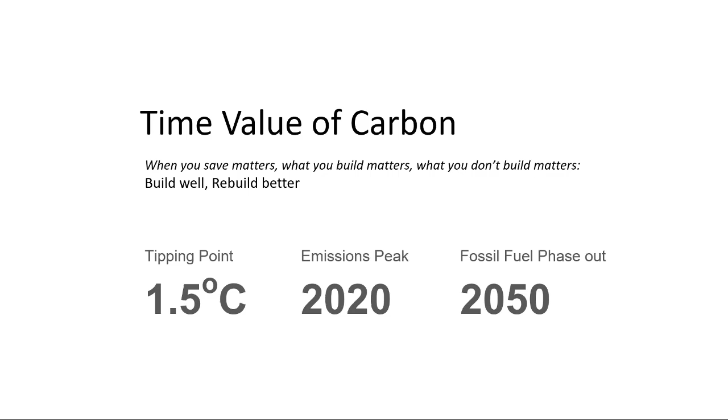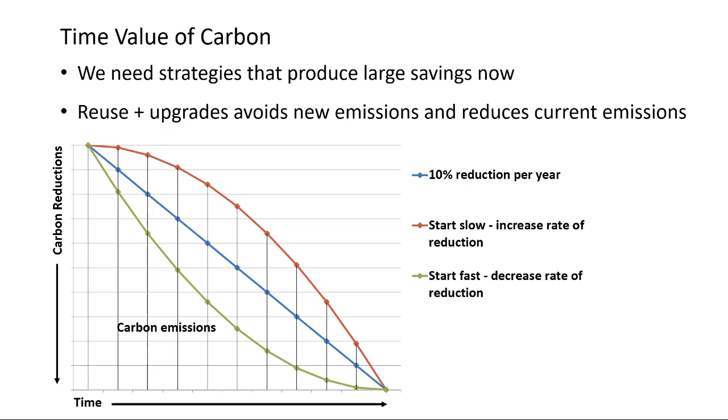But the embodied emissions are actually a huge piece. And the reason they're so important is they're the emissions that happen first in a building's lifespan. If you look at a building's lifespan, those emissions happen right off the bat, and then operating emissions happen over time. So in my book, they're the most important emissions to try and reduce.

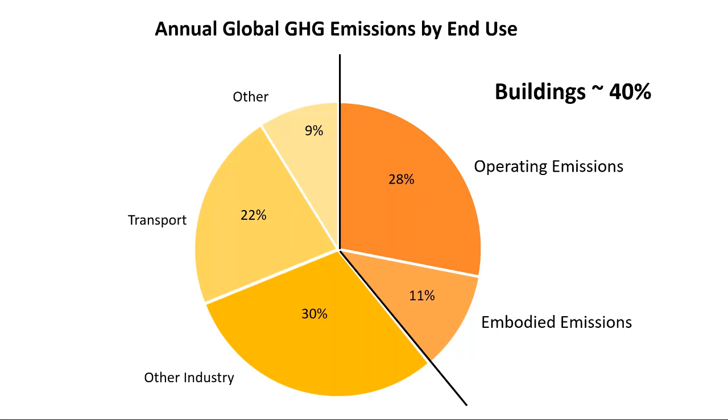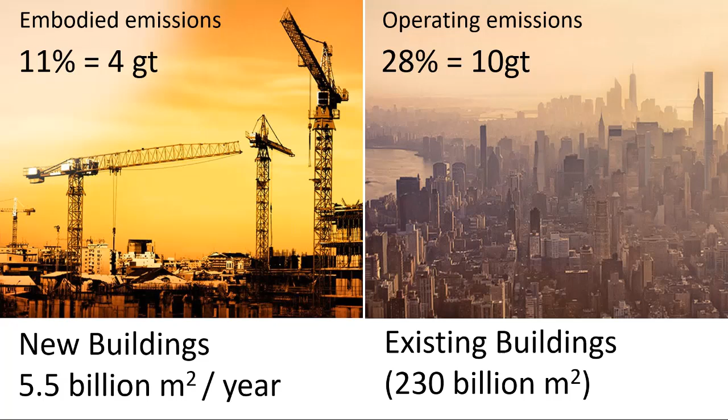The other thing to keep in mind is that the embodied emissions come from what we build every year, which is about 5.5 billion square meters globally. And it's about 11% of our emissions, about 4 gigatons. Operating emissions happen from all the buildings we already have, by definition, and that's 230 billion square meters. So the amount of emissions per square foot is much higher for building a building than for operating a building. We probably already knew that, but that's important to remember.

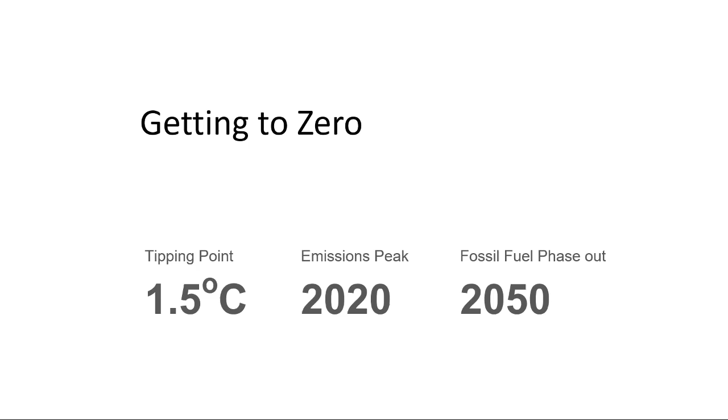So how do we get to zero in the next 10 to 30 years? Really, the next 10 years is what I'm focused on mostly. Architects think about getting to zero this way. We love making new buildings. We want to make new net zero buildings. There's lots of programs to encourage that. So we focus on making new net zero buildings.

We're beginning to think about reducing embodied carbon. There's a lot happening in the AIA starting to focus on this, and it's really important, a huge piece of it. And upgrading existing buildings is not on architects' radar. It's on cities' radars, but not on architects' radars very much. They'd rather build a new net zero building and talk about how great it was. So I think we've got it backwards.

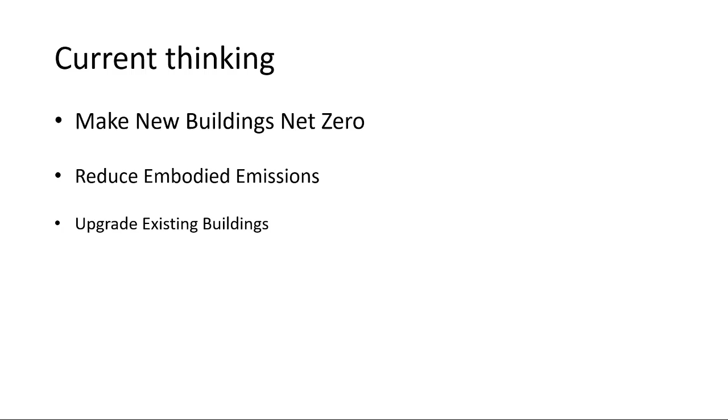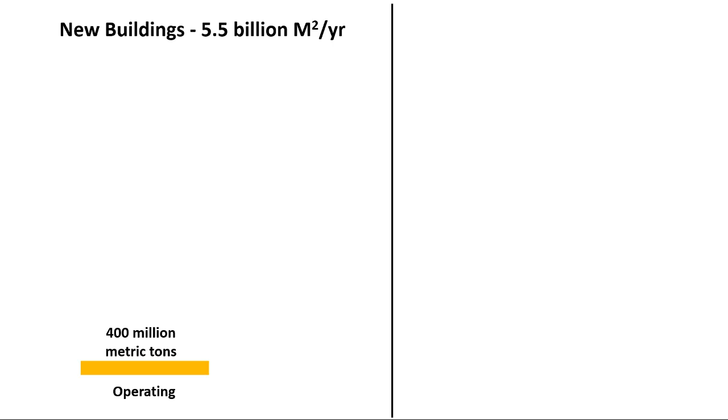And here's why. The new buildings we're building every year emit about 400 million metric tons of carbon to operate, if they're average efficiency; if they're more efficient or net zero, that number goes way down. To build those buildings, it's about 4 billion metric tons every year. And to operate what we already have is 10 billion metric tons. So as architects we're focused on the thing on the left, and we should be focused on the thing on the right and the thing in the middle.

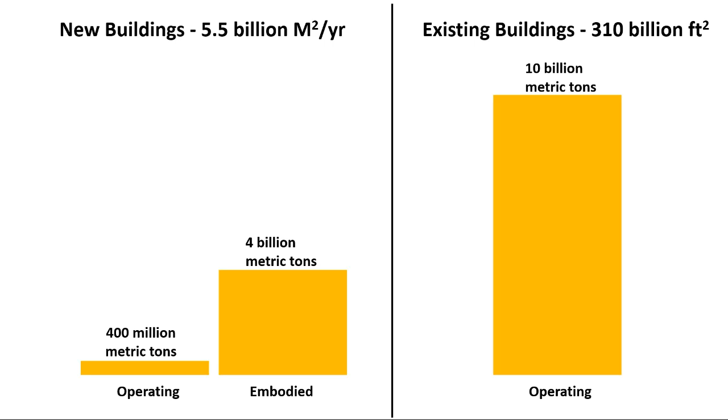So really, we should be talking about upgrading existing buildings to zero, reducing embodied emissions. Making new buildings net zero is great, but it shouldn't be our primary focus, really. I mean, any new building we build should be a net zero building, and that's not to say they all are, for sure. There's an awful lot of buildings going up around us that are maybe energy efficient, maybe green buildings. They're not net zero, most of them.

The other thing that's going to help us on this whole thing is the grid's getting cleaner. So as the grid gets cleaner, even if they're not net zero, you start to pull off a cleaner grid and the emissions go down. So that's in our favor, which is good.

So here's a little project which some of you may know. It's the DPR office buildings in San Francisco. It's a net zero. It's actually a net positive remodel. It's the offices for DPR Construction. It's not our project. We didn't design this building. We did the post-occupancy study after it was done.

And they had achieved a net positive building, and we came to them and said, how would you like to know how much total carbon this project emitted to build it and to operate it? Look at the whole thing. And they were really interested, so Integral Group, who was the mechanical engineer for the project, and our firm looked at the total carbon emissions, and we used a thing called Tally, which is a Revit plugin, which lets you look at all the materials in your building model and calculate the carbon impacts of those materials.

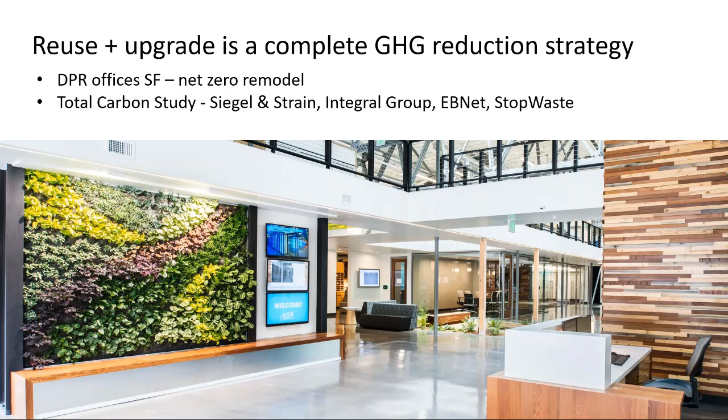And what we found was that reusing and upgrading an existing building was a really great strategy for reducing both embodied carbon and operating carbon. So here's what the different materials looked like. It ended up with about a 70% reduction in embodied carbon over building a new net zero building. All the hatched lines are materials that were reused, and all the solid lines were materials that were added to the project as we went.

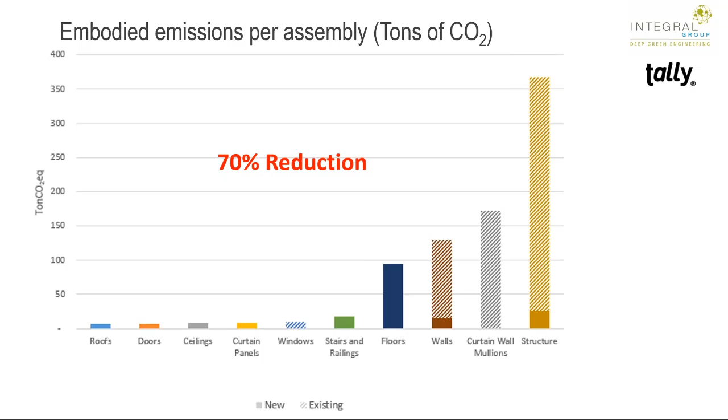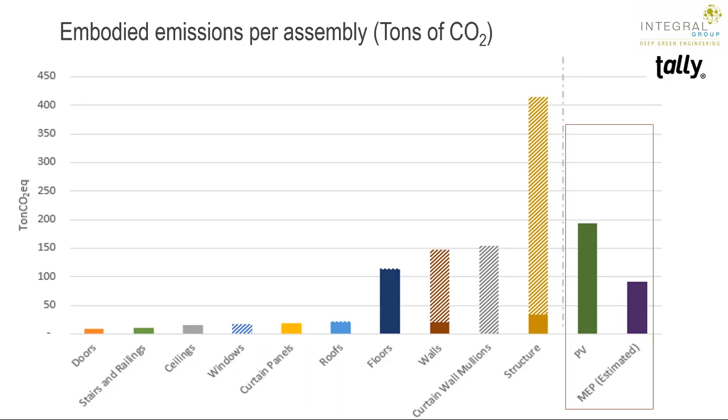And then Tally didn't have a way to model the PVs and the mechanical systems, and so we modeled those separately, and it about doubled the embodied carbon footprint of the building. But since those are the things that make this a net zero building, and the payoff is about 4 years, they're worth doing, even if you double your embodied carbon. And the payoff's quick. If the payoff was 30 years, they might not be worth doing, but it wasn't.

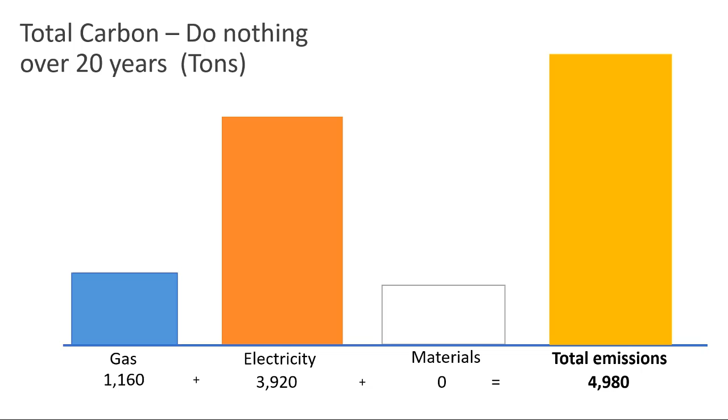So if they did nothing with this building, just left it alone, it would emit about 5,000 tons of carbon over 20 years. That's the carbon footprint of this building over 20 years. If they built a new net zero building, the only emissions would be the materials, which is almost 1,000 tons of emissions to build it.

And what we did was the materials went down by about 70%. This is a net positive building, so the total emissions over 20 years was 150 tons versus 5,000 tons from doing nothing, or almost 1,000 tons for building a new net zero building. So it just is a little illustration.

This was actually a 20,000 square foot, 2-story building, didn't have great orientation. The only energy efficiency upgrade they did at the envelope was the roof insulation. They had a historic aluminum storefront window that they couldn't touch because it was historic. So it was a single glazed aluminum curtain wall. They didn't need that, and they still got to a net positive building. And they did this on $160 a square foot, so basically a very competitive remodel budget.

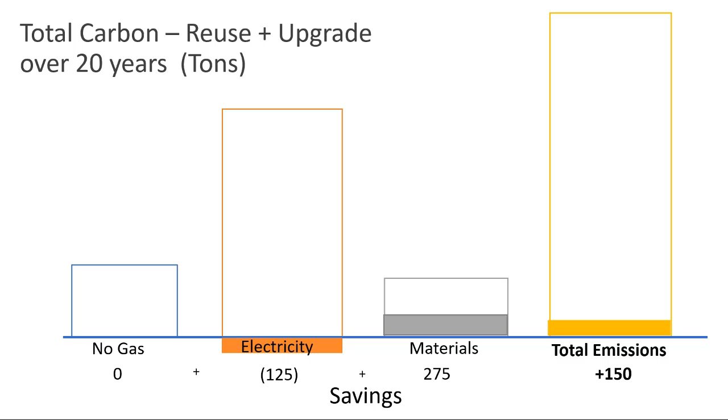And there's a whole lot of 2-story commercial buildings across this country. Almost all of them in every climate zone except maybe Alaska could go to net zero. It's doable. It's not impossible. So that seems to me where we should be focusing our energy. We can tear them down and build new net zero buildings, but there's a huge carbon hit for doing that.

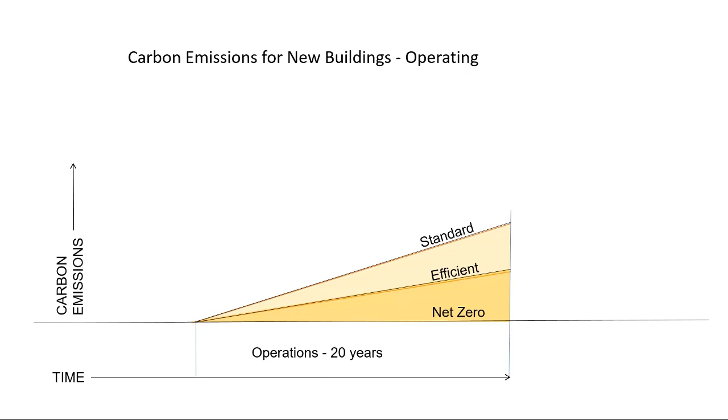All right, so what about new buildings? We're going to keep building them. We still need them. And if we're going to do it, they should be really efficient, ideally net zero. So this just sort of shows standard emissions, efficient building, efficient meaning probably better than code, and then net zero operations over 20 years. But as we say, there's that big carbon hit at the beginning that happens before the building starts operating.

So over time, those are the biggest emissions. Over 20 years, typically it's going to be about equal to the emissions from operating a standard building. So let's look at where those emissions are to understand embodied carbon a little bit. Bruce is going to go into this in a lot more detail, but I just wanted to give you an outline. So materials account for about 75 to 85% of what we call embodied emissions. So it's the site work, it's the materials, it's transport, and it's the construction equipment to build a building.

10 minutes, okay, great.

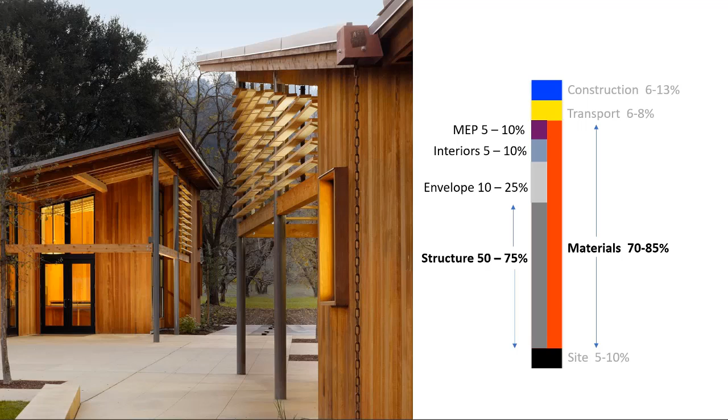And most of the emissions from those materials is in the structure, followed by the envelope, maybe interiors, MEP systems, but a lot of it's in the structure. So we really want to be focused on structure. So let's look at how that breaks down. So large, heavy buildings, which is typically commercial buildings, have about 2 to 3 times the carbon footprint of a small light building like a residential building. And it's mostly the kinds of materials we use and the quantities we use.

So small light buildings are typically wood frame. Maybe they're even light gauge metal, but wood frame. And most of the emissions in the big building are in steel and concrete in the structural frame and foundations. Even in the small building, a lot of it's in the concrete because they all have a concrete foundation. So that's typically the biggest. But even wood has a carbon footprint if you just count the energy and emissions it takes to process the wood and harvest it.

I'm sorry, MEP is mechanical, electrical, and plumbing. I'll explain acronyms and now I'm going to forget them. So anyway, CO2, I assume you know, but MEP.

Yeah, so this is given in kilograms per square meter. So there's a big range for big buildings, 200 to 1,200 kilograms per square meter to build it. It can be a lot. I think the average is probably at the lower end, but some of these really big buildings actually have a bigger carbon footprint typically than smaller buildings per square foot, which is interesting, because the structure gets so much heavier to build those tall buildings.

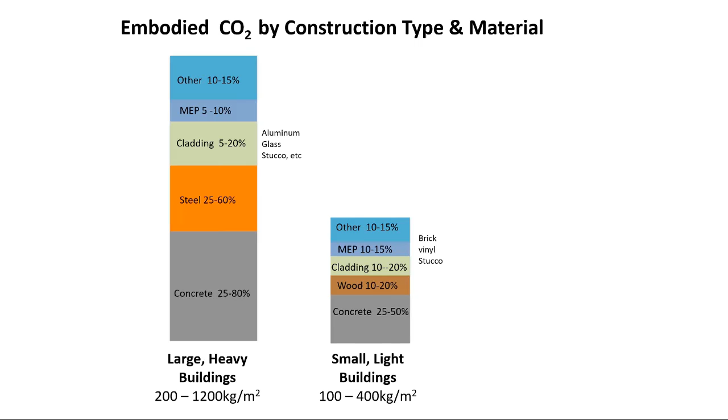So there's other reasons to build big buildings. You build them near transit. You reduce transit emissions. So there are good reasons to build tall buildings, but the building itself is worse than a small building on a square foot basis, just so you know. And then small buildings, it's in the wood, concrete, and cladding mostly. And there's ways to reduce it. One is we can be more efficient.

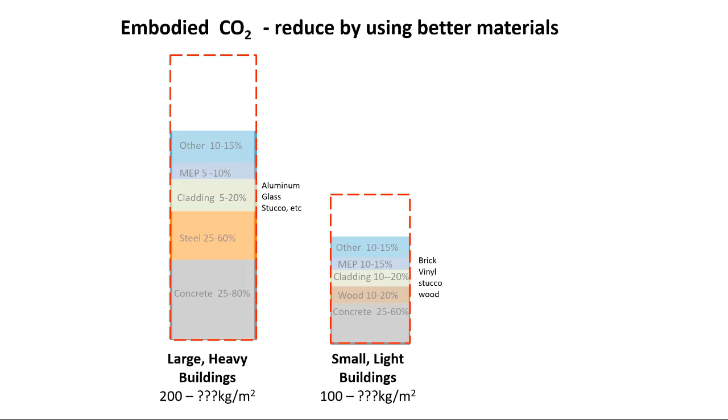We can design smaller buildings or design more efficiently and use fewer materials, and we reduce the carbon footprint that way. We can also use lower carbon materials, and this is something that Bruce will get into a lot more than I will. Using materials that have a lower carbon footprint or even a net positive. They're actually sequestering materials. And one way to use lower carbon footprint materials is to use salvaged materials. They have a lower carbon footprint than new materials almost always. But there's another way to do this, which is to reuse the whole building, which is what the DPR office building did.

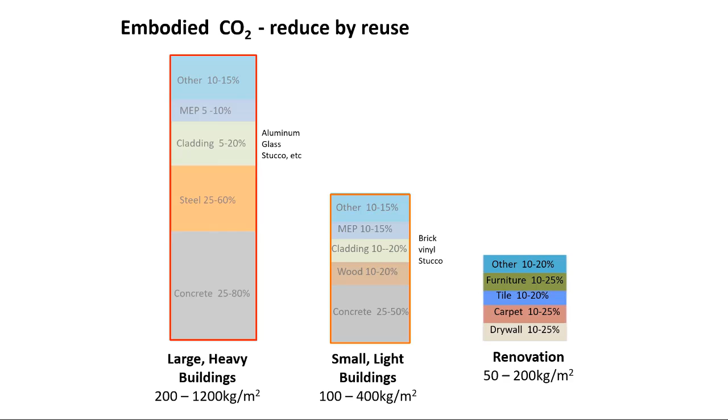So the carbon footprint of that is usually less than half of what a small residential building is. And typically, most of our remodels don't replace the structure. The structure stays. So your biggest carbon footprint stays. It's already been emitted. You don't have to worry about that. You're not replacing that. Sometimes you do a seismic upgrade and you add some steel, but it's not the same as putting in a whole new building. So this is a great way to do it.

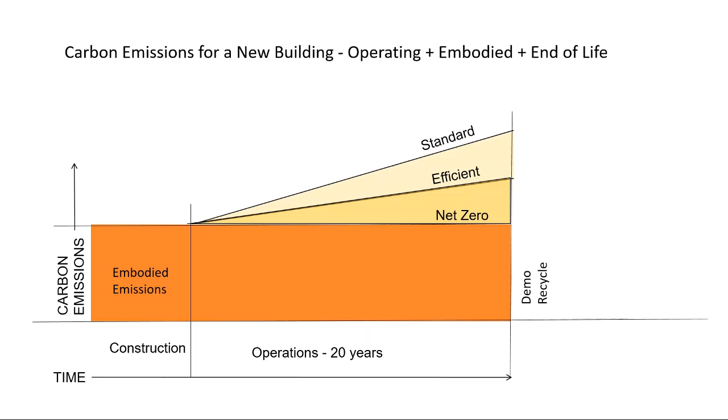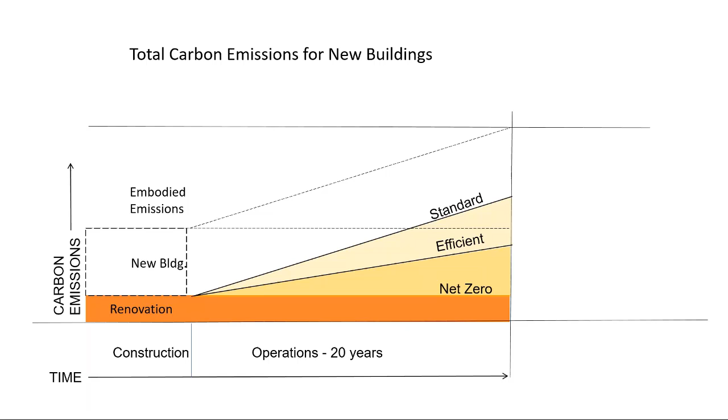So the first thing you want to do is to lower the embodied emissions. And you can do that through a renovation project, which probably cuts it down by 70%. So you're starting from a much lower point before you start operating your building. And if you're net zero, then the whole footprint is just that smaller renovation budget, or, as Bruce will get into, other ways to get this down. So I'm going to turn it over to Bruce to talk more about, there he is, embodied carbon.